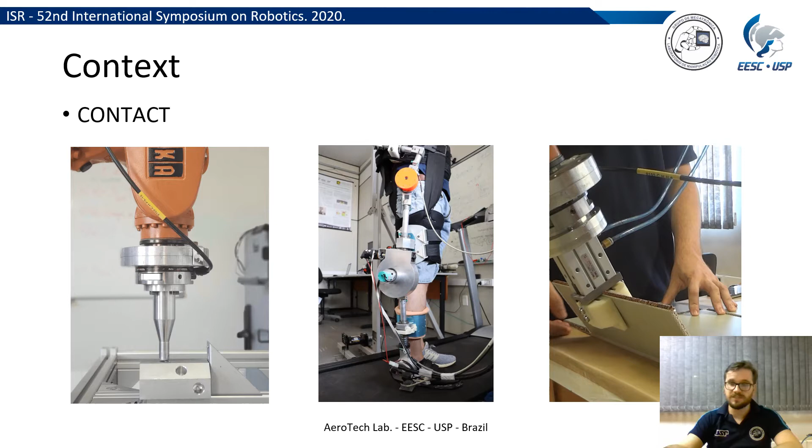So, for example, right now we have this research going on with manufacturing for aircraft, which is kind of difficult because it is not a scenario where robots are used to being put in, so that we have a lot of automation going on that way. We have all this difficulty in reachability and confined spaces, and we also don't have the assembly line as we know it, for example, in the automobile industry. So right here we need to position our robot, and that brings a lot of problems: positioning error, and all this kind of mapping and localization.

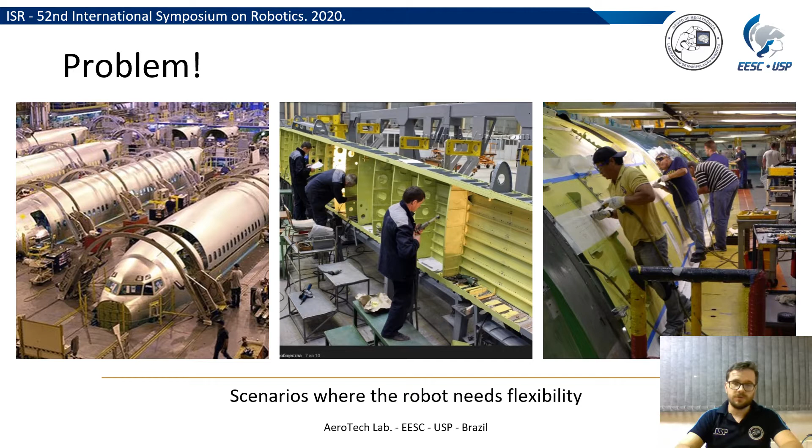But also we have different shapes and different sizes, which usually leads us to different stiffness, for example, in the environments. And contact, as I will comment in the next couple of slides, depends on the environment. So if we have an environment that changes a lot, we need to focus on adapting our robot to that.

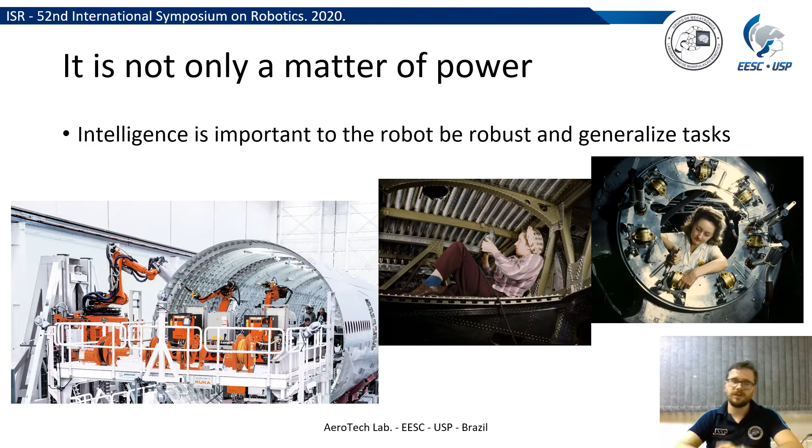Especially when we think that it's not only about having powerful robots. We have a lot of automation from KUKA and Boeing, but we need to think about other smaller applications, smaller planes, confined spaces, where humans have more of a tendency of accomplishing the task. So it is quite a challenge, and we need to keep focus on that. Although we cannot solve the whole problem, we are focusing on that.

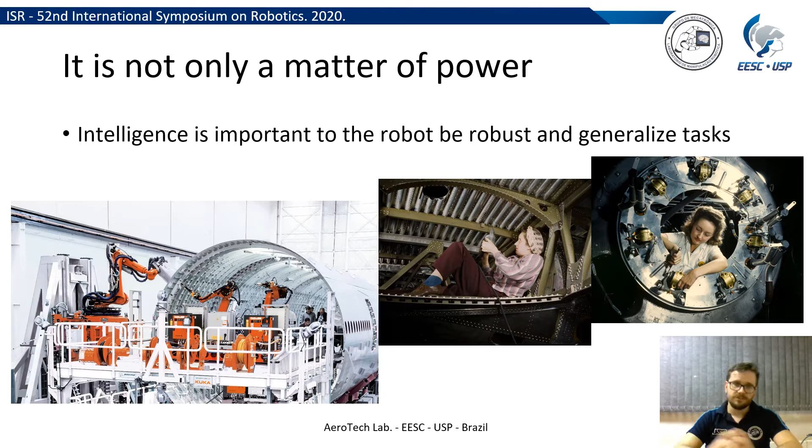So how can we make this assembly with an industrial robot in a very flexible, very changing environment? That's what we're going to present here. The technique that is broadly used to deal with contact in industrial robots is called impedance control, which used to be called force control, but force control is kind of narrowed down to specific applications. So in a more modern term, we would like to call it interaction controllers, because you need to relate how the robot will respond to interactions.

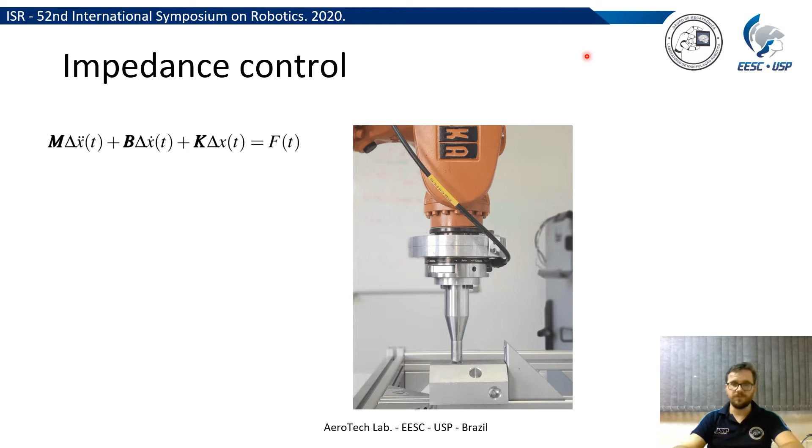But anyway, we want to do 3 degrees of freedom here. We have our plane here, with z going down, and x and y on the surface. So we're defining a controller on the z-axis, x-axis and y-axis, but due to natural constraints of the task, the stiffness is quite similar in both x and y directions. We can make a resulting controller which gives us, instead of 9 parameters, 3 for z, 3 for x, and 3 for y, we end up with 6, and I'll talk about that later in the optimization.

So the impedance controller is very good for fine local adjustment. What I mean is, since the robot is quite close to the part with vision and all kinds of sensing, we can start assembling, but it needs to be fine, which means it needs to correct displacement and positioning errors. So if we imagine that we already guarantee stability, which is crucial to this kind of application and all sorts of applications, the performance depends mainly on the robot and the environment.

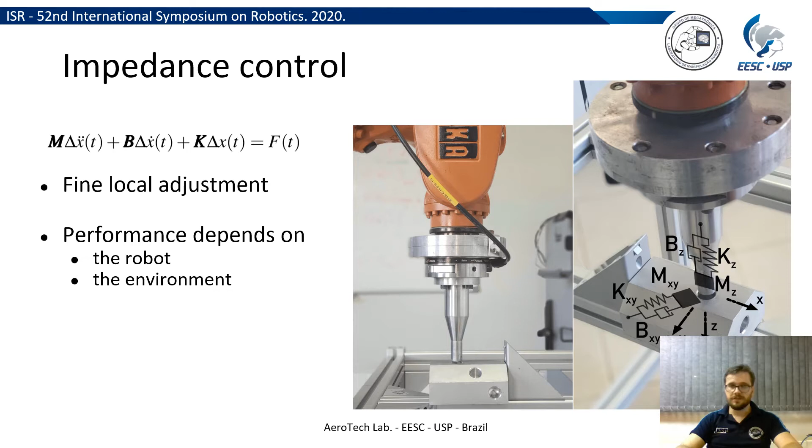When I say robot, I mean the whole robotic arm, but also the tools that are being used, and also the environment. So I cannot guarantee from the robot's point of view that my performance will be good enough, because I depend on the environment, whether the environment is stiff or more soft. When I was talking about the aircraft, remember the different dimensions and different stiffness, and that changes a lot. So if we can guarantee stability, how can we improve performance of the impedance control in this kind of task?

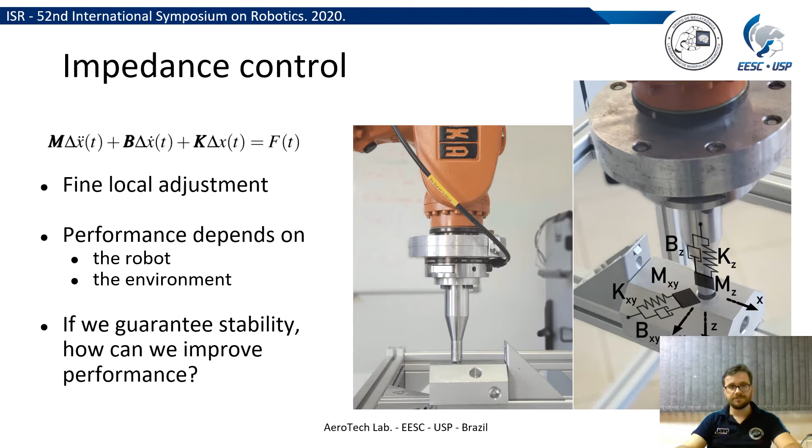So the first main application is to use adaptive controllers, usually estimating the stiffness and damping of the environment. But the problem with these tasks is that it depends a lot on our initial guess, otherwise we will end on local optima, local minimum or local maxima, and that depends a lot on our application. I mean, it may be the best local one. If we want even better performance, we need to broaden our search space.

Another way would be, okay, let's make it in simulation, learn on that, and improve our impedance control there. But the problem is usually they are 1 degree of freedom, maximum 2 degrees of freedom, and we cannot put all the nonlinearities in the model.

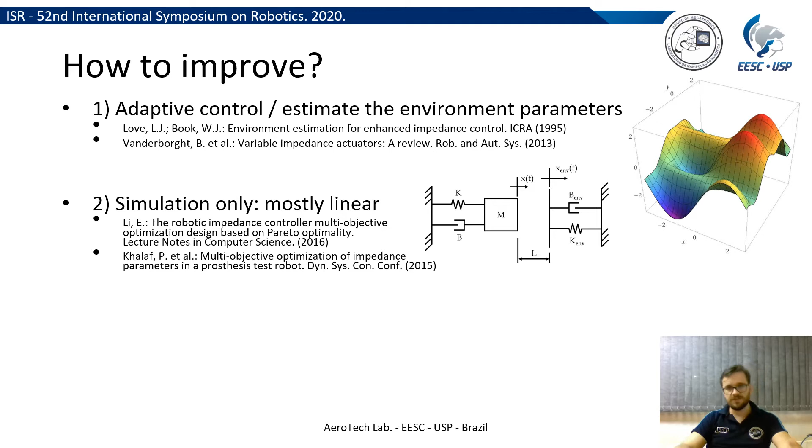So for example, most of the papers usually deal with constrained motion. So the robot is already touching the environment, but that's not what we want to optimize, because that's not close to a real application. So we want to be ready for unconstrained to constrained motion. That changes a lot, as it has been shown, especially in our last paper.

And the third most known way to do that, trying to avoid simulation and adaptive control, is applying evolutionary techniques such as genetic algorithms, which is our case, or PSO, or other kinds of evolutionary based optimization. These are good because we can avoid every kind of unknown parameter. We don't need to know the environmental parameters, the tools, the robots. We just need to collect data and optimize there.

The problem is, due to this kind of situation, we need a lot of data. We need to recurrently get data, optimize, try again, and so on. So, as far as possible, we need to make the search space smaller, or stop early. I mean, we need to have fewer parameters to optimize. That way we can have a faster convergence. So that's kind of a gift from the genetic approach.

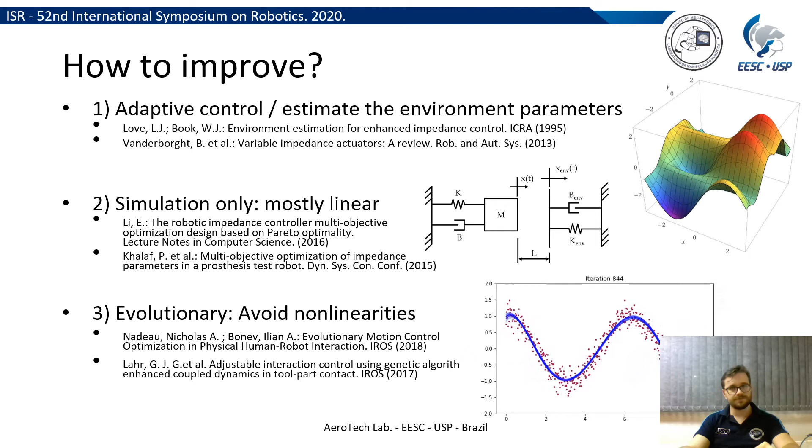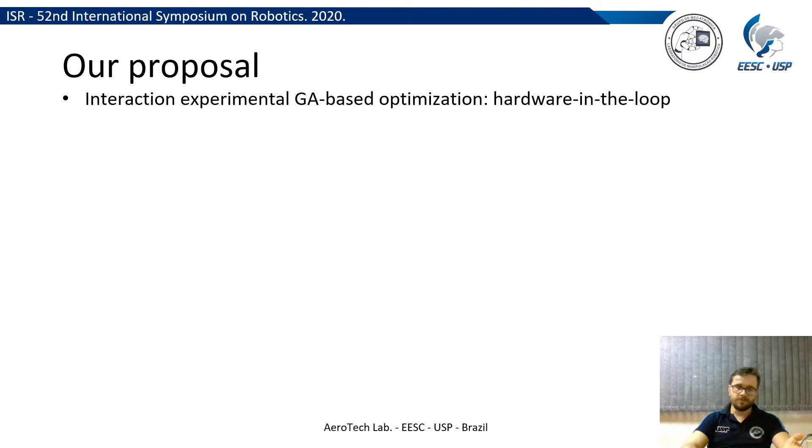So our approach in this paper is genetic-based optimization, which works with a hardware-in-the-loop setup. So for each loop of the optimization, we run a physical experiment, feed back all the signals read, extract the metrics and go back to the optimization, and this keeps going until we reach our stopping criteria or the maximum number of evolutions.

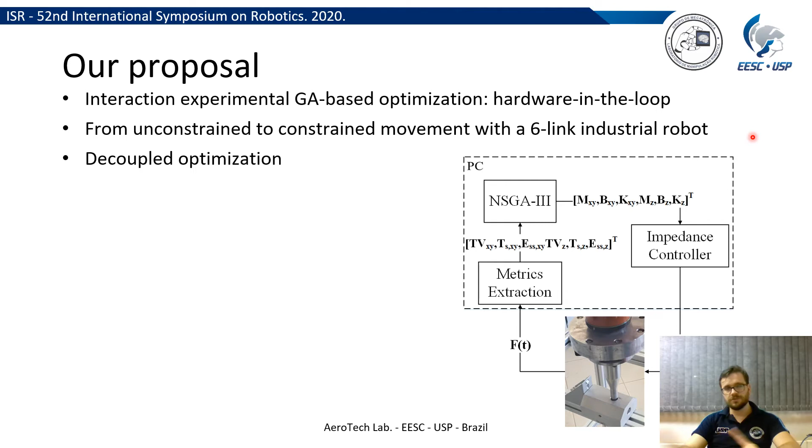So we still go from unconstrained to constrained, which is more realistic. It's already in an assembly situation, so it's very close to what is supposed to be in industry in this kind of application. One important thing to remember here: it's decoupled, so I can optimize Z, but look for different parameters in X and Y, although the task is not.

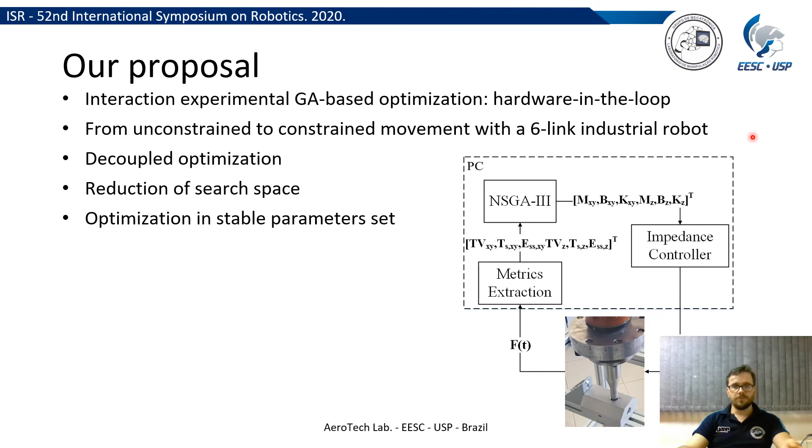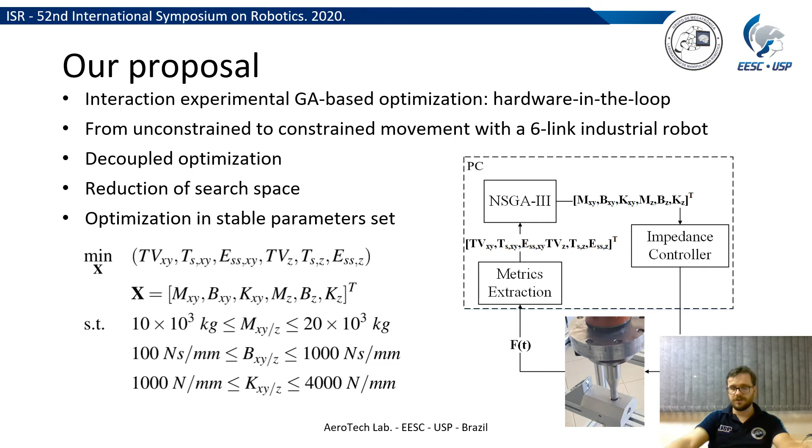So thinking about that, we reduce the search space, as I talked about earlier, and we go from 9 parameters to 6, and we optimize in stable parameter sets. So we minimize total variation, settling time, and steady-state error in the XY direction, which is X and Y combined, and in Z, trying to optimize all the parameters of the stiffness, damping and inertia matrices. Here are our constraints.

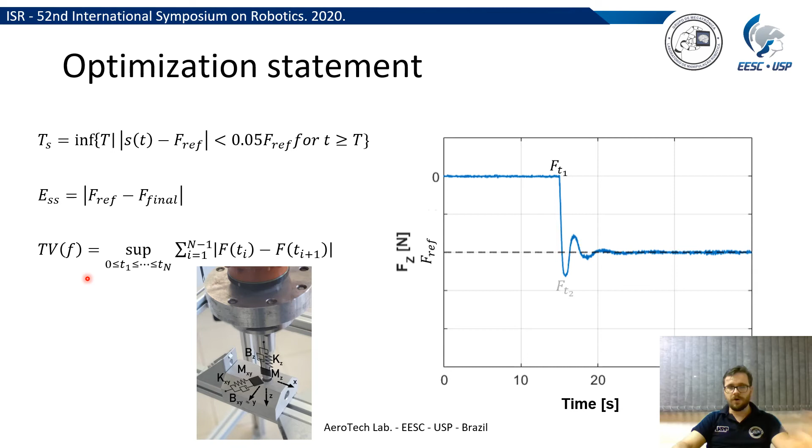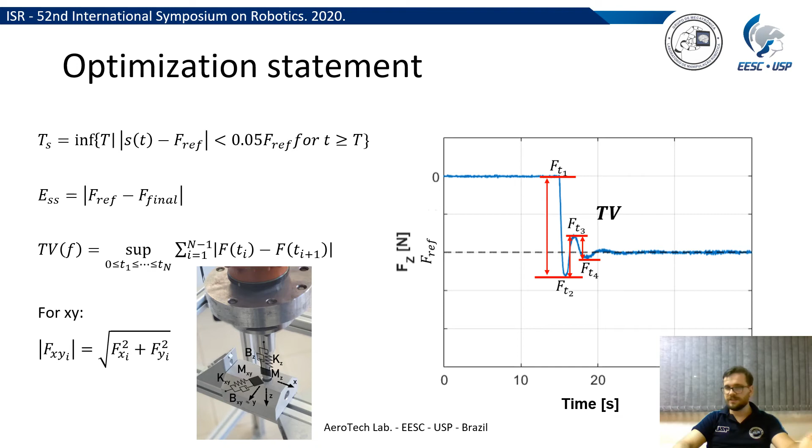And the last one is called total variation. If we take all the valleys and peaks, get the difference between consecutive valleys and peaks, and sum all of these, that's called total variation. Total variation measures the amount of vibration and oscillation in our system, while the settling time needs to be smaller because we need to finish our assembly as quick as we can. All the metrics for Z are as shown here, and for X and Y we just take the modulus in the XY plane.

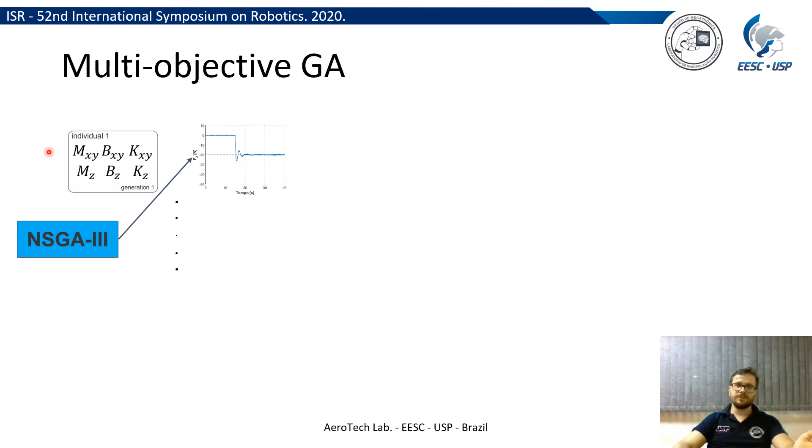So for the genetic algorithm, we use NSGA-III, which is a more recent version of NSGA-II, which is a very common genetic algorithm. It makes a first guess, then we try that guess, and then the algorithm proposes a lot of other ones, and then we try all of them, get all the data,

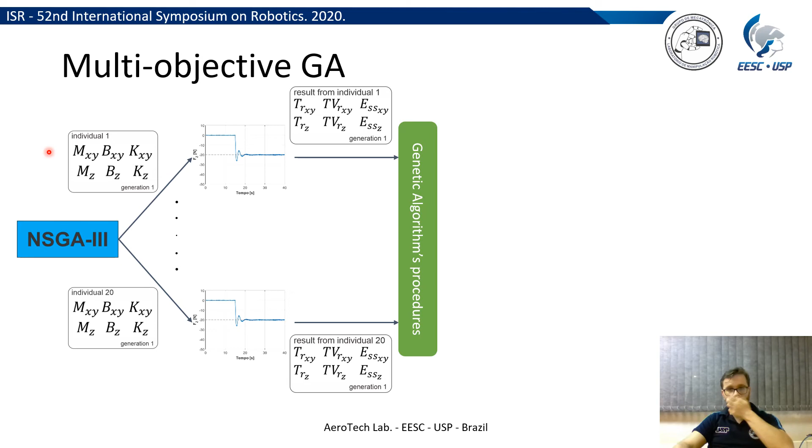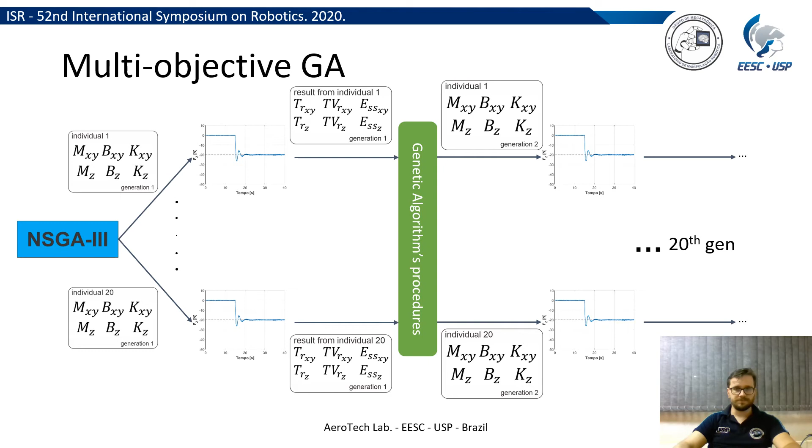and then feed back to the genetic algorithm. So in our system here, we propose 20 different ones, and then there's another loop, measuring again, and we use here a 20 generation setup. That's more than enough for our system here, as we will see.

So here, the experiment is: we get closer, we know the right position, but then the algorithm inserts a random error, and then we start the experiment. So the random error with the hardware-in-the-loop setup gives us a very broad configuration application. So that's really important to us.

So we have this amount of time that the experiment can run, and then when it's settled, we get all the forces related to that experiment. We don't keep track of the error, so it can change a lot for different parameters. And then when it's done, it just goes up and restarts with a different error, as we will see right now. So that's the main experiment.

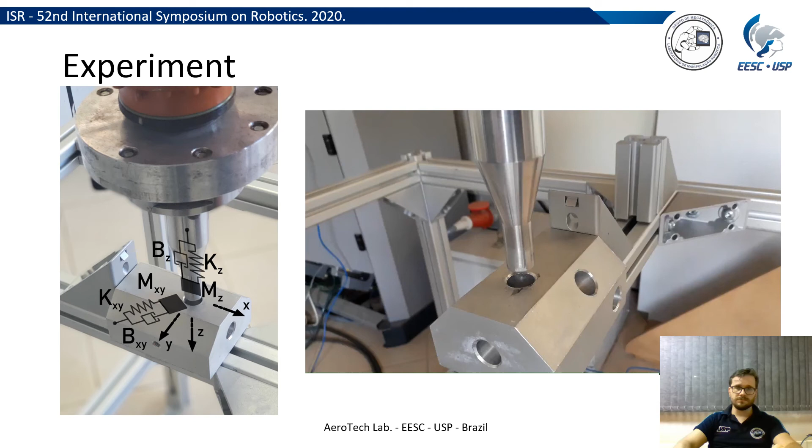So for the first generation here, we have a lot of oscillations in Z, and you can see here it's all positive because it's the norm for X and Y. And after the 20th generation, each signal here, as in the first, is a different M, B or K, a different impedance controller setup, a different trial.

So we can see that oscillations got much smaller, and also our system got quite fast to converge for some. As the genetic algorithm tries to get the whole Pareto front, we can see here that we have very good candidates for what we are looking for, which is very small oscillations and very quick settling time.

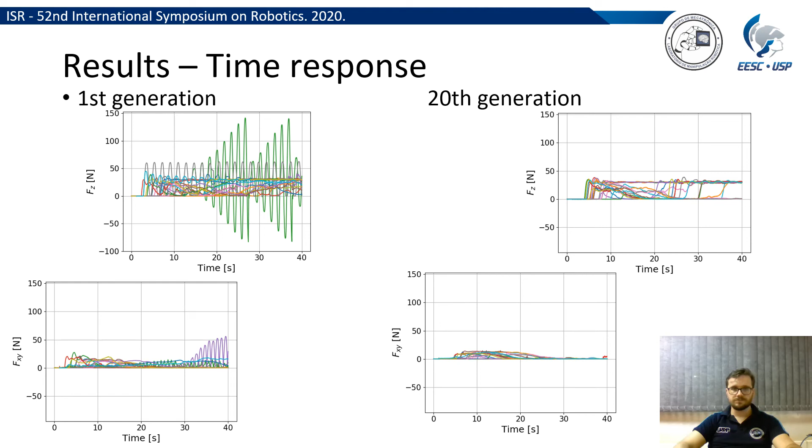So just a quick show. This one here is the best individual being recorded. This is the same recording I showed you earlier. The second one here in the corner is the worst. So as we will see, when it tries to achieve contact, we can see oscillation in the tool.

Some authors would categorize this as unstable, as we're talking about interaction control. So although it's not classic instability, it's just bouncing, and that's not a good setup. We don't want that.

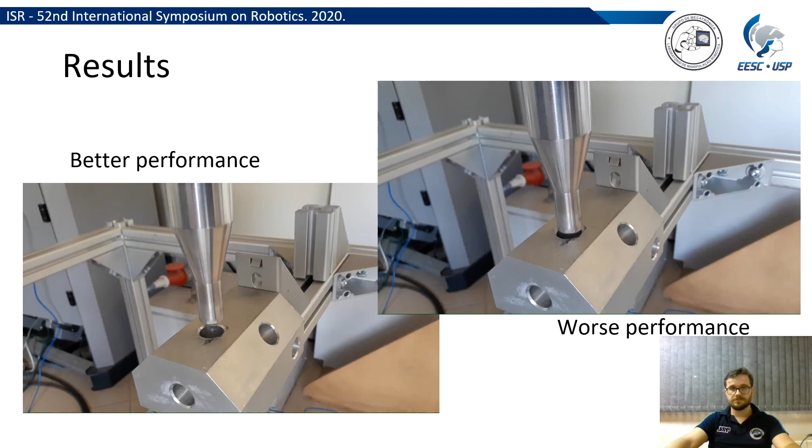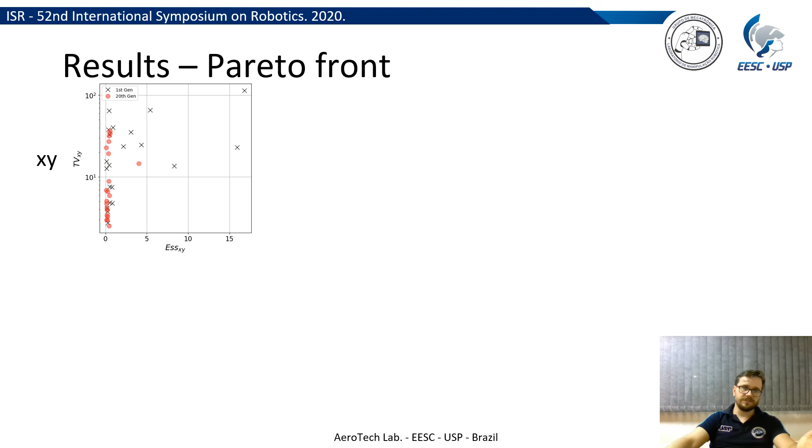As we can see, we actually got a Pareto front here minimizing the steady state error. So the algorithm tries to get all this distribution across total variation here. And we don't forget that we have the coupled Z and XY. So we can see here for the same metrics, total variation and error for the Z, the Pareto front here.

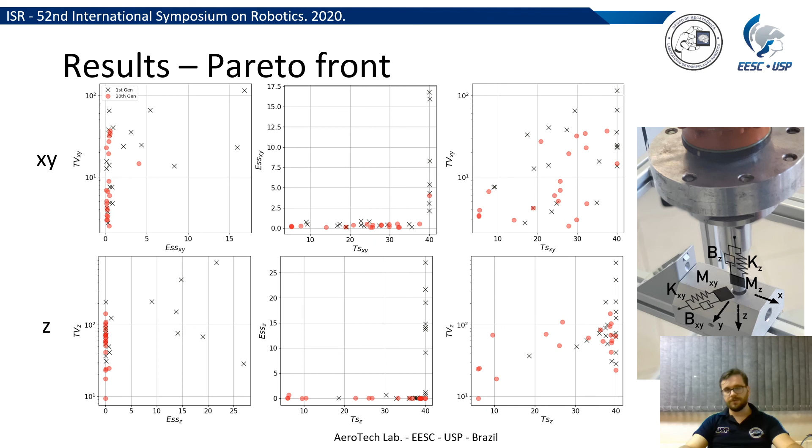That's the same between steady state error and settling time. In the red dots here, you can see the front being formed. But when we plot total variation and settling time, we don't have this clear Pareto front. That's because they are very trade-off variables. So we need to take care of all that.

In conclusion, we implemented a genetic algorithm that was capable to optimize in a very close to real industrial scenario, with displacements and forces, interaction controllers, an industrial robot, and it didn't take the whole day to optimize. You can read in the paper that we can work on a stopping criteria to stop early. But we can have something like 20 generations, like an hour or something, and we get the optimal parameters.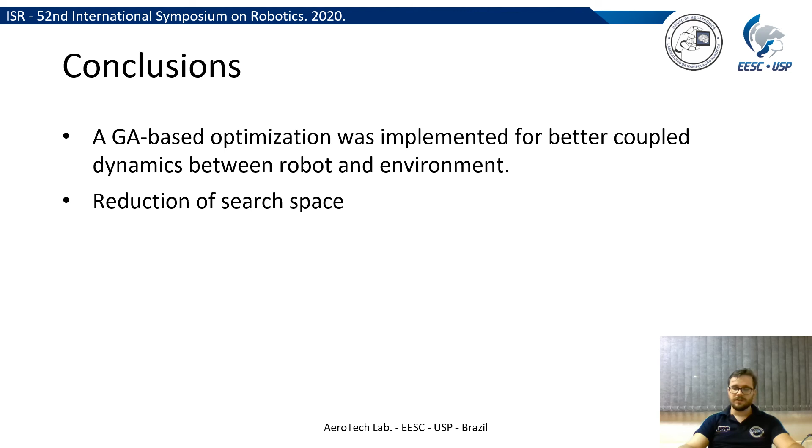So reduction of search space was really important here because it took us much less time. And it's really robust to positional error because, as we can see, the error was random and we still could get the parameters converged.

So as future work, we would like to work on a stopping criteria, which is really important, and also to bring the rotational axes into the optimization, which will bring us even more optimization parameters that we need to work on, but that is just part of the problem.